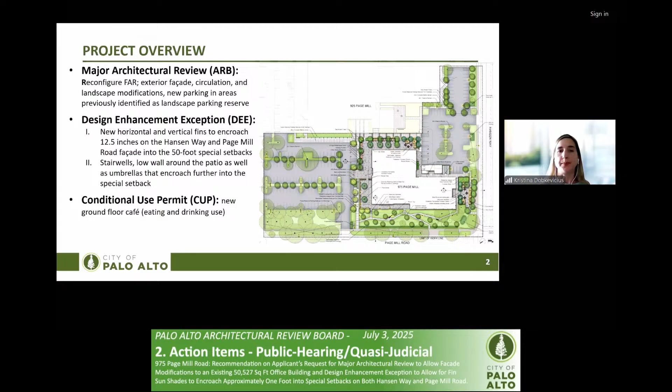A little about the existing structure and proposed exterior changes: the existing structure consists of two-story concrete tilt-up panels with punched window openings and setback green tinted glazing on most of the facades. The primary entry facade facing the Page Mill Road parking lot features a green tinted and white spandrel glass curtain wall system above a ground floor arcade with multiple entry doors. There's also a large paved plaza with small ginkgo trees separating the parking lot from the building entrance.

As part of the architectural configuration, the previously clipped entry corner facing Page Mill Road will be infilled by relocating and realigning the structural bay closest to the 925 Page Mill Road building at the back. The new exterior will be composed primarily of large format white terracotta panels with varying vertical rib projections. Zinc-clad panels will complement these surfaces and be used at secondary entrances and to accent window pairings across the elevation. New walking paths, outdoor seating, and gathering areas are proposed, and the existing entry plaza will be redeveloped to provide ADA accessible parking, delivery access, and staircases.

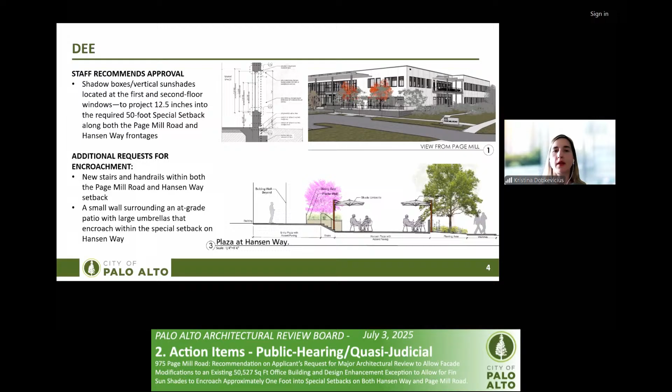The project also includes conversion of 3,769 square feet of existing office space to an eating and drinking use on the ground floor—a cafe use—which the applicant states is intended to serve employees within the building and the broader Stanford Research Park area. The proposed cafe space is permitted through the requested conditional use permit and is consistent with the Research Park land use designation.

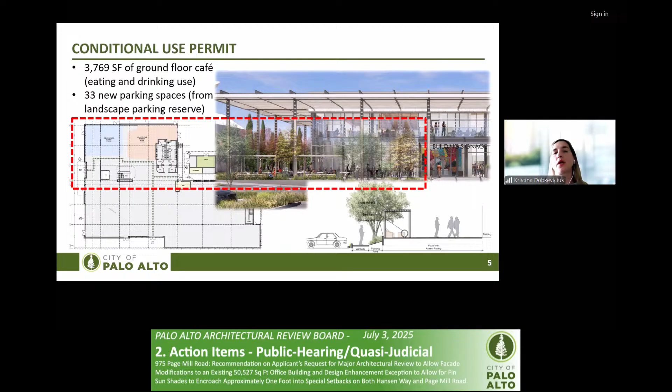A number of existing parking spaces on the project site are currently located within an approved landscape reserve area, originally approved under the 1997 architectural review approval action for the building at 925 Page Mill Road. The project removes 43 substandard compact parking spaces and narrow drive aisles currently located in the landscape reserve, and proposes 33 code-compliant spaces with wider drive aisles on the site.

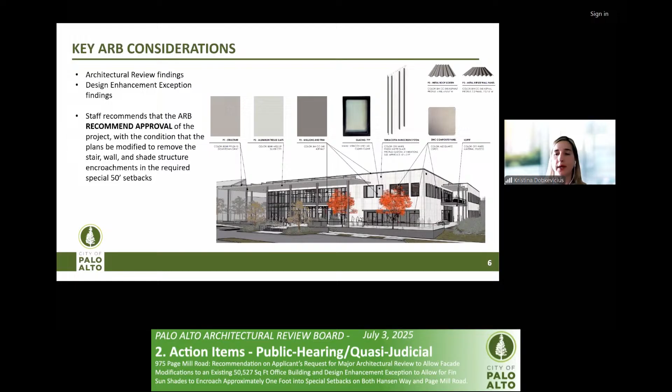Staff finds that the project is mostly in conformance with architectural review, conditional use, and design enhancement exception findings. Staff recommends that the Architectural Review Board recommend approval of the project with the condition that the plans be modified to remove the stair, wall, and shade structure encroachments into the required special setbacks on both Page Mill and Hansen Way. Staff finds the project consistent with relevant plans, policies, and regulations adopted by the city, and recommends the ARB recommend approval with selected modifications to the Director of Planning and Development Services. Thank you.

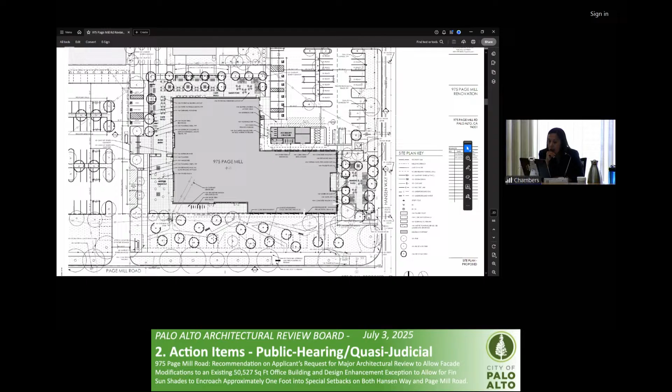Yeah, that's correct. So I don't think that's the ramp. And I guess the bigger picture question is, generally speaking, a building that may be elevated and it's right at the setback line, would they not be allowed to put stairs to go up to the building within the setback?

So those stairs are not required for access or entering or exiting the building. Those are additional stairs. For example, the one along Hansen Way is for the employees of the building to go down and have a break, relax in that area, and come back to the office. So it's more like an amenity space for the staff. It's not an exit point.

And no, the answer is no. We would not allow stairs within a setback unless it was through an exception process, or it was written into the code that you could have stairs encroach. There are code sections in certain zonings that have exceptions specifically for stairs to encroach a certain amount into a setback, but that doesn't apply here.

So typically a building would have their staircase approach within the building envelope or buildable area, should they need one. Are we sure that it's not a required entrance or exit though? It's not, I mean, there's already two exit points there because you already have the sloped walkway at the end of that as well, and there's an existing exit right here that ramps down.

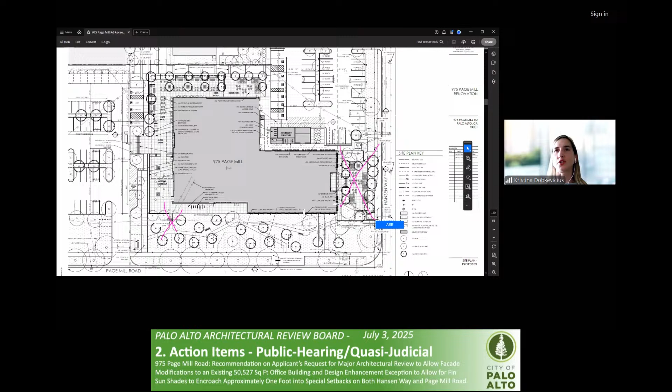It's for the sunshades, for the vertical elements along the facade, for the tiny sunshades. You can see them, correct. So this is what we are recommending to approve, and we are not recommending to approve the patio walls, umbrellas, stairs and steps encroaching into the special setback. We have conditions of approval asking to remove those. Got it, understood. Thank you for the clarification.

To clarify this a bit more, if there were a ramp, would that be different? And also at the same time, could you explain why stairs would be allowed on the Page Mill side with railings? No, it's not. They wouldn't, we are stating that that would require an exception.

To planning staff, it seems an unnecessary exception as there are already code compliant access points, both from Page Mill on the interior and along Hansen Way. And therefore those exceptions don't appear to be necessary, so we are not recommending approval of those.

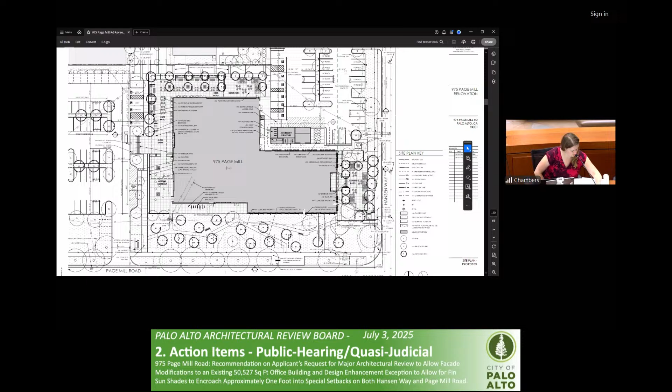And if you wanted to do a ramp, there are ramps. There are grade level walkways that are accessing it, but again, maybe it would be best to hear more from the applicant before we discuss this further. I think we're okay at that point, unless there's any further questions, understanding the clarification of the 50-foot setback. I think we'll move on to the applicant's presentation.

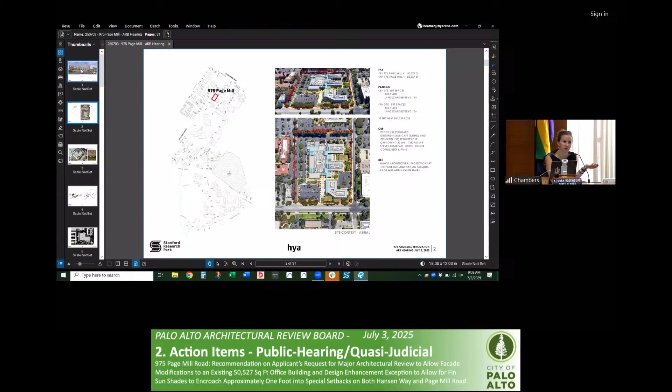Unfortunately, we do not allow that. So you'll give your presentation, we'll have time for questions afterwards. Exactly. And then there will be public comment, and you will also have a time to respond to any public comment that may come up. As long as there is time for questions. We'll have plenty of time. Great, okay.

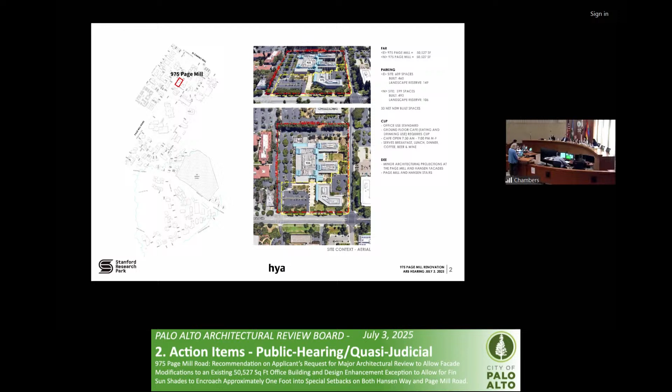Well, thank you very much. Let's get this going forward. Christina did a great job with an overview of the property location. I would like to assure you that this is a small subset of a larger 10-acre site. The yellow area highlighted there is the actual area of work. There are two completely separate structures on the property. The project will remain net neutral as far as FAR in this renovation.

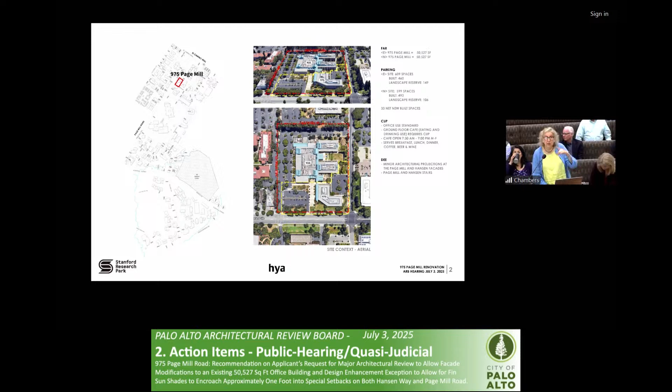As Christina mentioned, there will be 33 new parking spaces developed, and there is a CUP and the DEE, which we've had some conversation about. The existing building is located right at the special setback on Hansen Way and Page Mill, and that corner is very close, only about 6 inches off of the special setback area. The existing building also is built very closely to the adjacent building at 925.

The existing building also is of an exposed concrete tilt-up with that sort of creamy sand color, with red tile accents and the green standing seam metal roof. To our eyes, to our project goals, we wanted to bring this adaptive reuse a clean, fresh, contemporary expression, and the currently dated expression was a primary drive for change and renovation. You'll also notice that the windows are fairly small and mannered. We wanted to enlarge them to bring a great deal of daylight into the building.

A primary goal is to increase the activity at ground plane around the building. The entry plaza separating the building from the parking lot is at parking level grade, which is approximately 3 feet below the ground entry off of the parking lot. As you go around the building towards Page Mill, that corner is 4 feet 9 above the sidewalk on Page Mill. The corner is approximately 3 foot 9 above the Hansen Way Page Mill corner, and 3 feet above the Hansen Way sidewalk at that side entrance. So you can see we have some challenges in site accessibility and just plain old access.

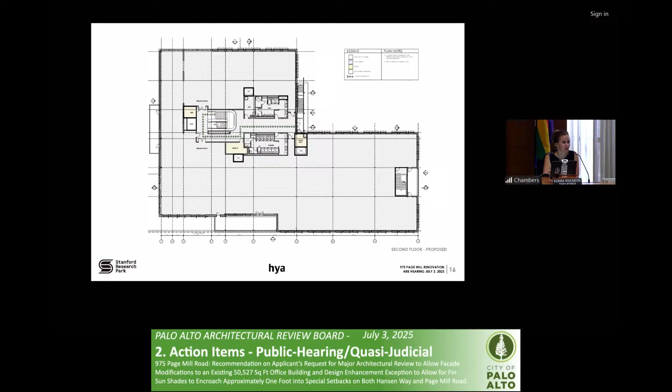Thank you. I'd love to talk a little bit more about the design. The terracotta panels are large, about 2.5 feet wide by 4 feet tall. There are 4 profiles: a flat panel, a single vertical rib, 3 vertical ribs, and 5 vertical ribs.

The material finish board is not the profile we're proposing, but the color and the break of the color on the rib is why that was provided to you. The panels are paired vertically so that when seen across this very large facade, they form a distinct syncopated pattern going across it. The current design is very repetitive, and we were working to find ways to maximize window size, bring life and distinction and modernity to the facade to make it a bit more timeless.

You're also seeing an example of the vertical sun fin, one of the staff-supported design enhancement exceptions. These vertical fins on the Page Mill facade and horizontal on the Hansen facade work with the solar orientation to better shade the windows and walls. The windows are very deep set and naturally shaded, but this additional shading helps reduce solar load and reduce energy costs. The whole building is getting a brand new mechanical, electrical, and plumbing system.

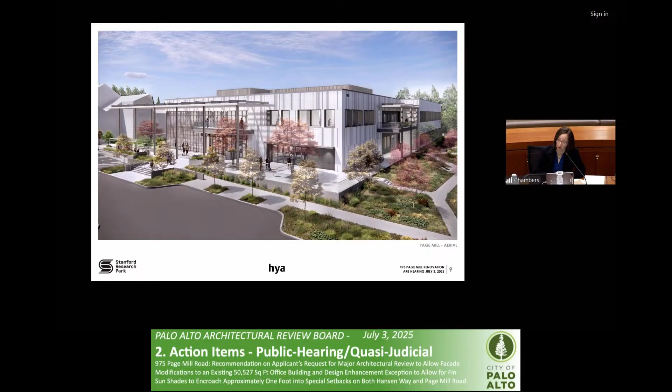Right, so they're painted into a corner here. Right, and significant grading that brings the level of that area up higher would, similar to some of these improvements—actually more so than the proposed improvements—get in the way of other future use of this space, if that really is at least part of the idea with the special setback: that it reserves this space for future planning efforts with the roadway or how the research park is envisioned in the long term.

So staff would have a significant concern with that level of fill as well. Okay, so going back to that, it seems like because you're building retaining walls for the patio, are you building up grade with this definition we just talked about? Only minimally, to facilitate drainage. It's not a primary effort. So is it possible that if we didn't have the concrete walls around the edges, the patio could be a slab with a thickened edge, without the wall? Is that true?

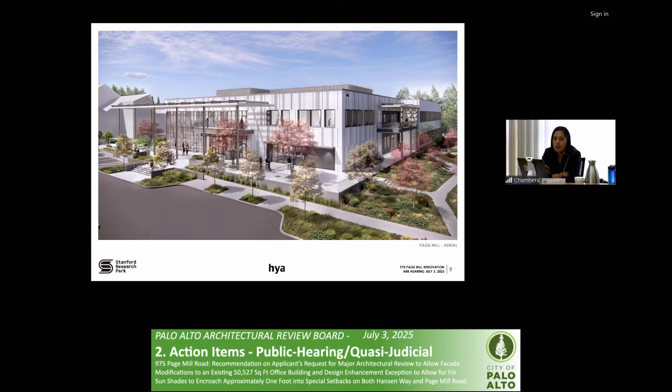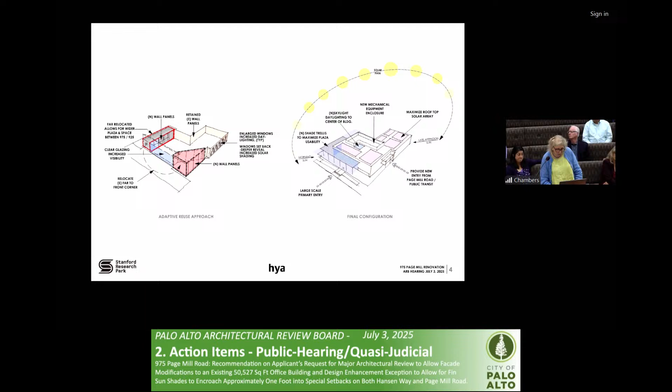No, and maybe I'm misunderstanding. The patio itself is more at the sidewalk level. The area immediately outside—let me see if I can go back to the aerial, or is there a site section? Right here, you can see—actually, you can't see it. There's a sidewalk adjacent to the building right now, and then there's this very sad little triangular piece of concrete, and then you're fenced in. You can't really do anything because of the grade change.

Trying to get that area—I think if you go to your A101 plan, that might be a good place, or this one. Yeah, fine, this is a good one. You can see this, and again, this is a required egress for the second floor. It has to allow connections to the public way, and it does so—this, here, correct. And then we chose to connect it to this new network of sloped walkways and seat benches on the Page Mill frontage with this shortcut here.

Again, the site is dipping down this way, so you've got your highest point of change in this location. The existing trees, shown as single circles versus the shaggy circles which are the new trees—we were trying to protect that group here on this corner, as well as this group, and then turn this from that sad little... I'm sorry, I can't be as derogatory as I should be, but it is a very sad location. We're really just trying to make it an inviting, usable space. It is a very visible corner.

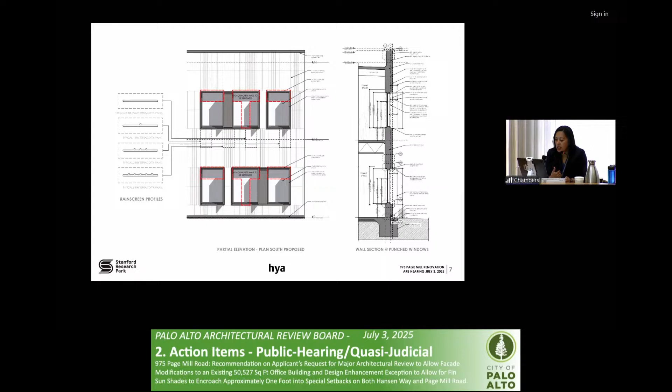I'm going to get it wrong. The ribs on the panel are 1 inch. The fins that project either horizontally or vertically, I believe they're 12.5 inches. One facade is slightly further away from the setback than the other, so one of them, I think, encroaches 12.25 inches and the other's like 11.25 inches.

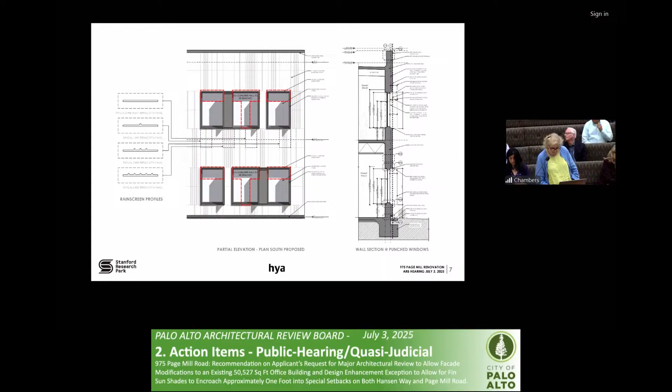This is showing the vertically oriented fins, and you can see them here on Page Mill. When you get to Hansen Way and to the Hansen parking lot, they turn into horizontal fins. On the Page Mill parking lot side, there is no need for them there, so they aren't there.

Oh, I see. So on Hansen's side, it's just a top fin, because the section on page 131, which I think was clipped on the page you had before, shows the vertical fin and it seems to project into a walking surface down at the bottom here. If it's vertical, but I don't know if it's vertical.

Correct, that's correct. So here on Hansen Way, they're horizontal when the sidewalk is adjacent to the building, so they're 10 feet in the air. But on Page Mill, when you have landscape adjacent to the building, they are adjacent to the windows and no one gets close enough for them to be an impediment to access.

So is that providing enough shading for what you're trying to do for 12 inches of projection? We looked at making them longer, and we are working with an energy modeler and sun study evaluation group. We're trying to find the marriage of architectural design and buildability, using some more standard profiles for the aluminum trims at the window, and we believe this is a combination we can achieve.

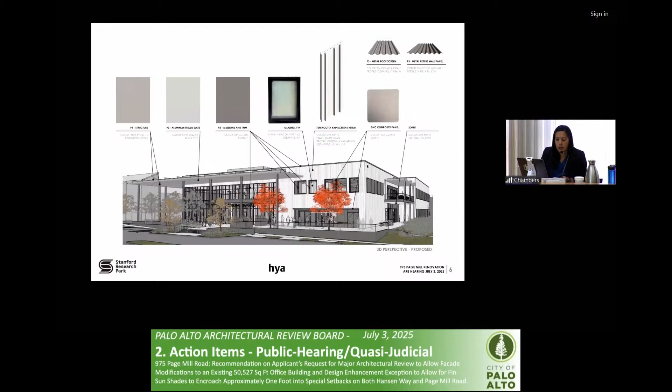Yes, the roof screen is the P3 mullion and trim color, the darker of the three. The roof screen is a corrugated material with 7 3/4 inch center to center vertical ribbing. We're also using a corrugated panel for the exterior accessory structure with bike storage, building storage, and trash recycling, but it's the same color with a different profile and narrower ribbing.

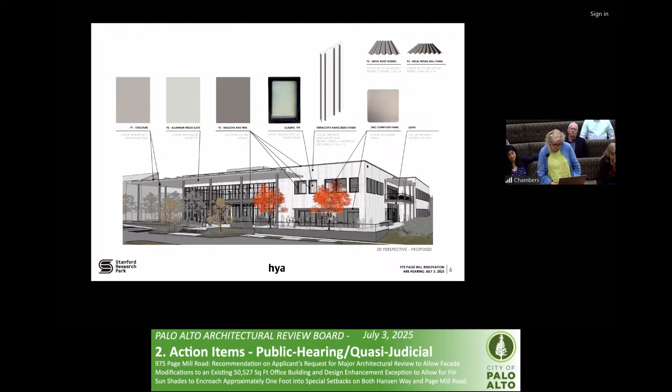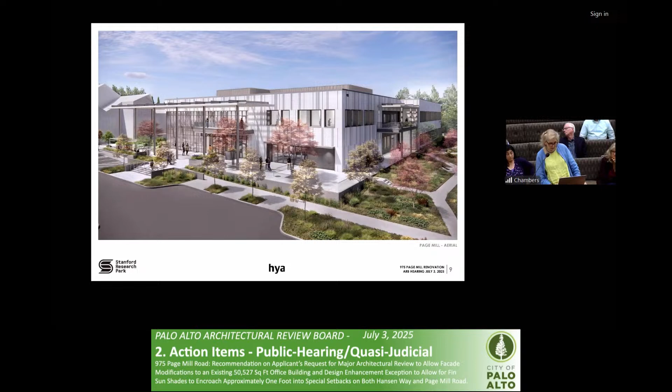They're very differently viewed, and we were actually very particular in locating the mechanical roof screen. You just barely see the top of it here, where our eye level is clearly at about 30 feet. You'd be hard pressed to see it as a pedestrian, and you don't see it even with an elevated visual point of view at Hansen. You do see it a little from the Hansen parking lot, but even there our eye level is about 15 feet in the air. There's the accessory structure over to the left - an existing concrete building we're now cladding with painted aluminum panel and extending.

And the terracotta fins - you said they're an inch, like in this view the shadows make it look like it could be quite thick, but...

I apologize, this is not as strong a representation as this particular image. They're about 1 1/8 inches wide and then 1 inch thick. The edges are softened, both the outer and inner edges. Actually that's one of the things we really loved - how the glaze and light is going to fall across that during the day.

Cloud cover - I'm sorry to gush, we're in love with that white color. It just does magical things when the clouds move and the sun moves.

Thank you. So speaking of those white terracotta tiles, I love them too. I was just trying to imagine this building clad in those tiles, the whole building, especially on the Page Mill side. The building is fairly long, and now that I've seen the sample, it has a little sheen - almost semi-gloss. So I was wondering about even the glare from the outside, since the building is so white and so big, and the sun is shining.

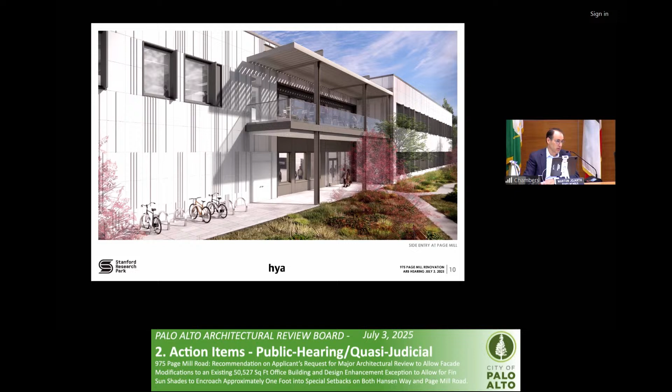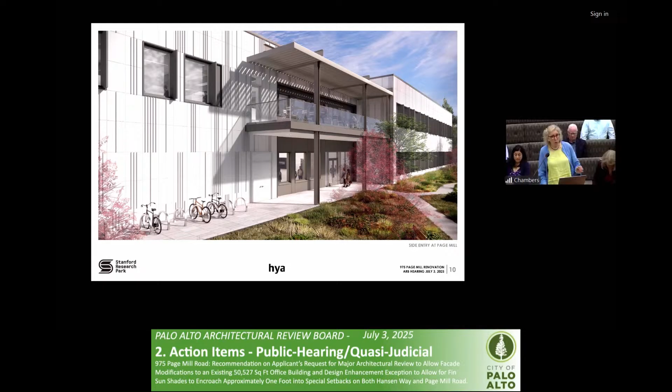The length of the Page Mill facade was something we recognized early on had the potential for repetition and monotony. Let me go to that hard elevation - sorry, it's going to take me just a second, this is going to slow down.

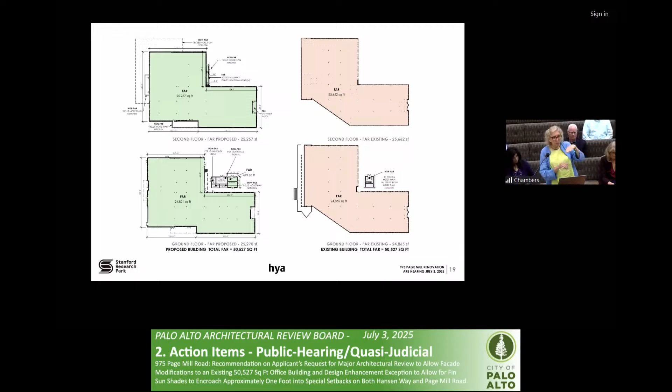Apologies. One of the reasons we stepped back the Page Mill entry was to break the facade. We also wanted to be able to emphasize the Page Mill entry with that balcony and trellis, to bring additional color and variation to the overall facade length.

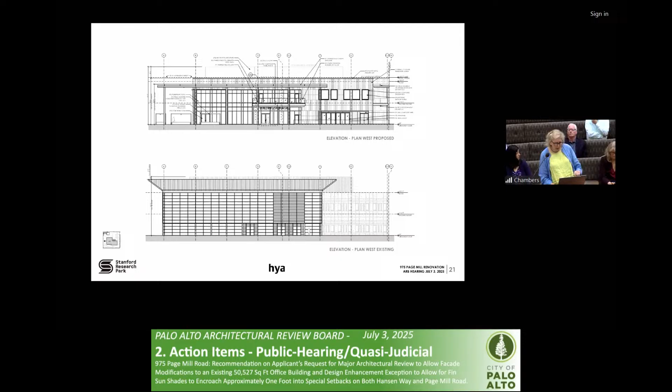This is the facade - I'm sure you noticed the pair window, pair window, pair window pattern, so there's the zigzag of that component. This portion has no windows and a slightly different window pattern above. There's an extensive use of zinc and larger panes of glass at the entry on both the lower and upper floors.

We didn't really think about alternate colors or more than one terracotta color. The finish, I think, is actually more on the matte side than semi-gloss. We've taken it out in the sun, and we have some larger samples on the way, but we've looked at it in different angles, high and low. I haven't been too worried about that glare issue you mentioned. I'd like to think we've been proactive in addressing the length of the facade's design with the approach you see here.

We're really trying to have something clean and simple. I don't think you're mentioning enough the design idea here with these vertical elements that break up the pattern, and break up their own pattern as well. So there's a very casual feeling to the outside of the building.

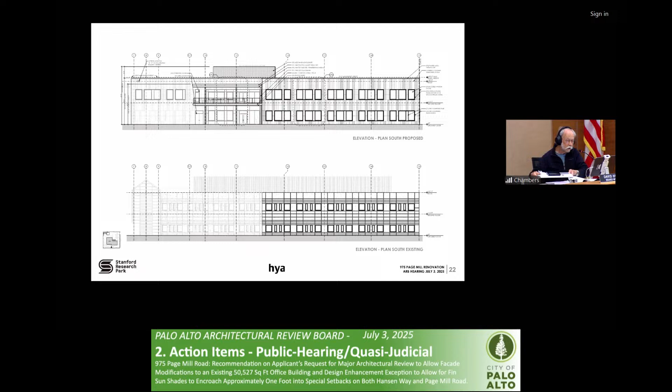I agree with David. I think the shadows and lines will break it up nicely, and also the concept—I love talking about LRVs, I love that paint sort of stuff—but this one, because of the texture and because there's an organic element to it, it's not a sheet of metal. Because it's terracotta, it's got very minor pitting and texturing that will bounce the light around slightly differently. Even looking at it on the board, I'd argue it's closer to almost a very light gray, but it's not—it really is a white, just a muted white.

I feel like I'm supposed to have a question here because we're not supposed to make comments at this time.

Let me ask, do you know the LRV of it? That would be the question to ask. I do not, but I'd be more than happy to have any of you come to our office and see the 50 other whites we explored in honing in on this particular one. It is a tough thing—some go purple, some go green, some go gray. This one has just a hint of warmth to it to knock down some of the bright white.

And these lights, you do have a mix of— Terrible. Yeah, daylight and, well, yeah. But it has been a love of ours.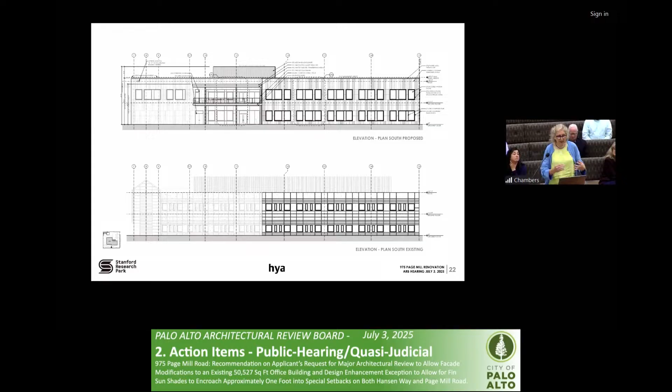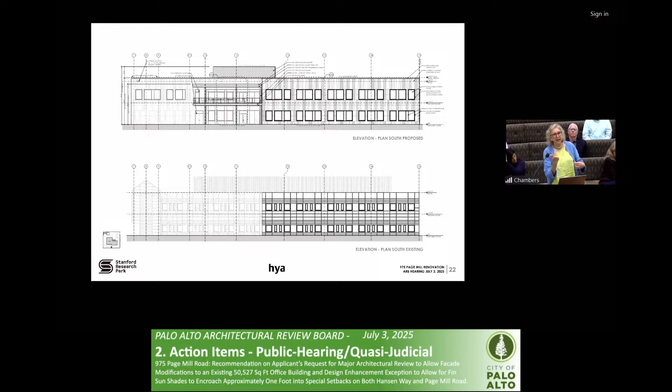I do want to go back to your question about the overall facade. One of the things we talked about early on is that this facade in particular has to read when people are going 45 miles an hour on Page Mill—zip, zip, zip. It has to read when they're at an intersection paused for a moment, and it has to read when they are adjacent to the facade, engaging that landscape area at the front of the building. So as David mentioned, we wanted layers of scale, layers of texture, and bringing in that extra color just felt like going sideways from that path. Thank you.

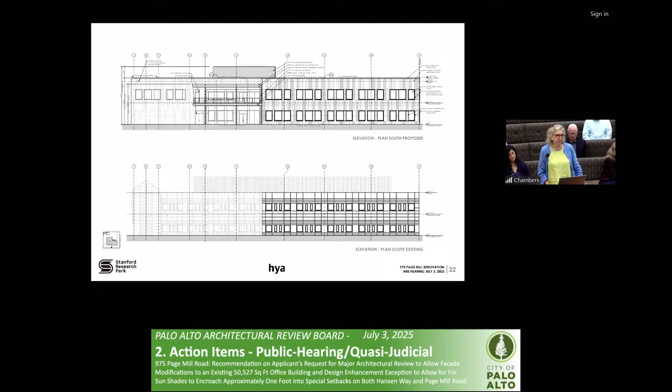I'm going to ask for any final questions from the ARB for the applicant and or staff. Go ahead. Thank you for your presentation. I have a question about the circulation. Can we move on to the site plan? Yes. Sorry, let me see if I can get there faster.

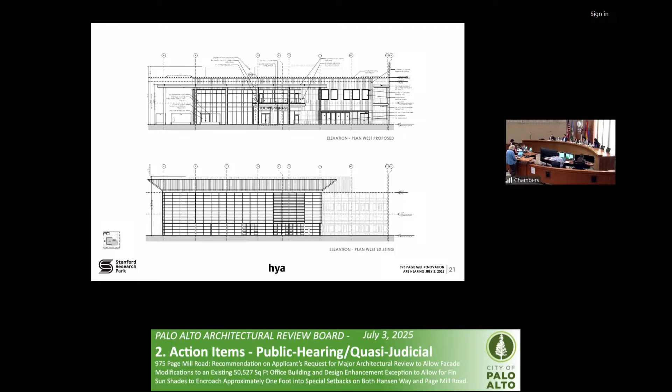While I do appreciate and understand the reason why you want to raise the front patio and have a more inviting entrance plaza to the 975 building, what I noticed is that compared to the existing very wide plaza walkway connecting both 925 and 975, with the proposed parking lot and the raised and relocated stairs, it seems like 925 is kind of disconnected as originally proposed.

So it goes from a 20-foot-wide plaza walkway down to, I don't know how wide the ramp is, but it's narrow. Also, when people want to access 925, they have to go up and down through the ramps. So I want to know the reason why you want to relocate the exterior stairs, and what the impact is for the existing pedestrian traffic pattern. Thank you.

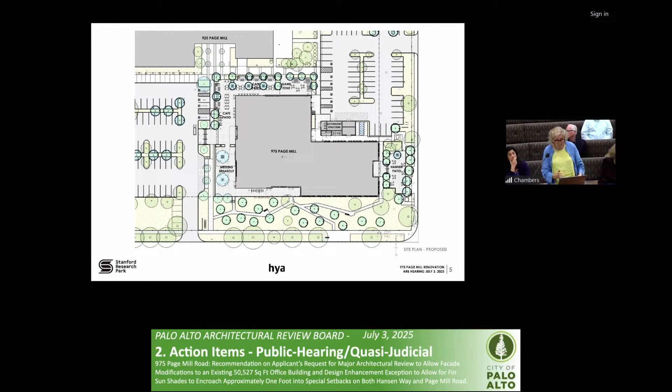I don't believe our project detracts from the entrance that you feel here when you're in the parking lot going towards that building. I think the two of them sit together as two separate buildings on the same site that respect each other, but don't necessarily have to mimic or copy each other.

The 925 structure has what we affectionately call beaks, the little projecting roof components, and that was a big theme going around for the whole campus. It always felt like it wanted to be a trellis, an architectural embrace of the area outside of it, but it never quite got there. So we feel our wraparound trellis is what that building wanted to be, to embrace the landscape and to reach out.

It's a 10-acre parcel.

Thank you. My question is more like, what's existing here, the red line shows the existing plaza walkway, so now we just shrink down to that narrow. Does it impact the traffic pattern?

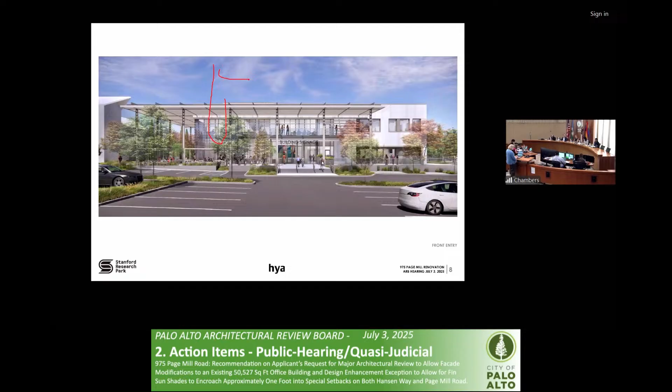Great question. So all of this area is open. There are no interior walls until you get to the wall behind the servery. So this is representing a pedestrian interior circulation path to the seating, the outdoor area. You could just use this path if you were in the building and wanting to go to the patio. It's not necessarily that you are part of the cafe dining or the back of house or the servery zone.

I see. And one minor question: I see the main entrance door is offset from the center line of the exterior stairs. Is that on purpose?

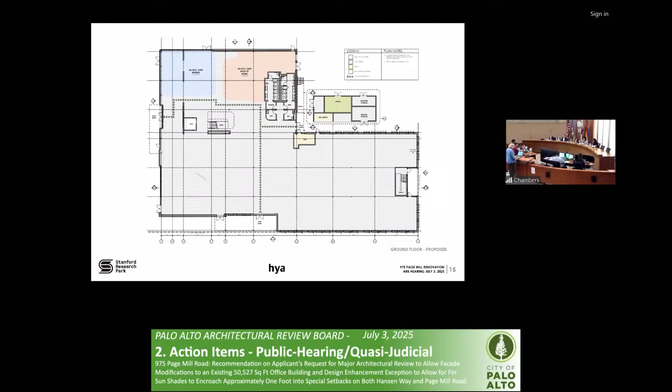Well, part of our adaptive reuse is to retain the existing structure as much as possible. The second floor has a 24-foot column spacing, while the ground floor has a 12-foot column spacing. So this is one of the quirks of an adaptive reuse project.

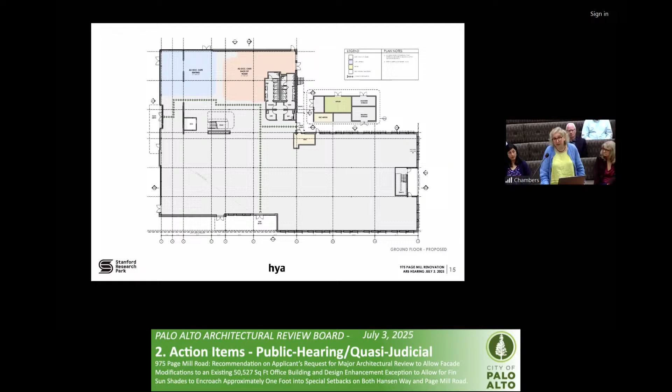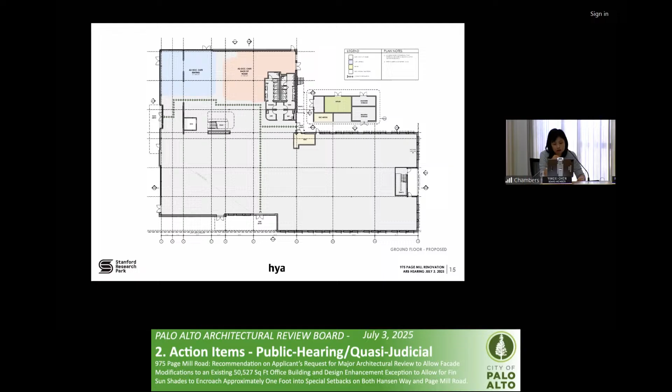We hope that the way we've incorporated it adds some interest and variety to the building, and still is a solid design. One last question for the materials: for the exterior stairs accessing the second floor, what's the railing material? This is glass at the rear parking lot. It's a perforated metal panel from Bok Modern, and we're working with them to customize the pattern so it has proportions as close as possible to the ribbing and shadows happening on the wall.

Okay, and how about the low concrete wall? What's the finish of it? Is it smooth finish or like the back patio we talked about? I believe the finish of the low concrete retaining walls, Marco, is just smooth concrete. Okay, thank you, that's all my questions.

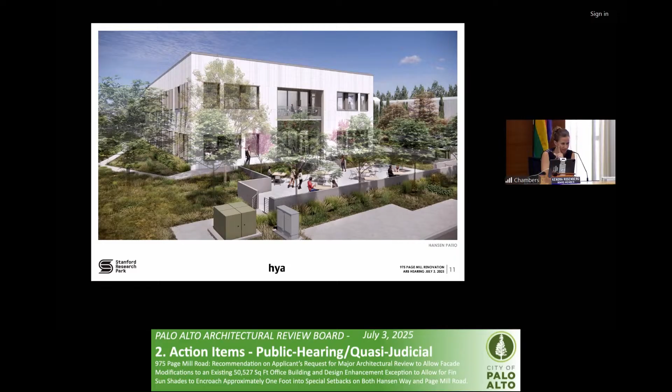I'm going to keep my questions pretty short. No, if you'll just humor me for two more minutes. Can we go back to the site plan really quickly? Yes.

So just to clarify, we've got easy access here, here, and here, and then people can obviously go down this ramp, which goes down and then back up, if I'm understanding correctly, because this is a higher side and this is a lower side. Is that accurate? Correct.

And then for this staircase here, sorry, I'm going to delete my own stuff. On this corner, is there any reason—I understand you've got a door system here so you'd want immediate emergency access out instead of having them go that way, that makes sense to me. The question would be, why couldn't that staircase be incorporated in the corner over there? Why would it have to be outside in that special setback? That is an excellent question.

We were trying, as you can see, to extend the edge of the building here. We did a number of studies where we looked at some switchbacks, and it just felt disruptive to anybody taking their bike back to this area, or who had come up from here with their bike after getting off the bus and dropped it off there. It felt like a missing tooth when you nibbled it out of the corner of the patio.

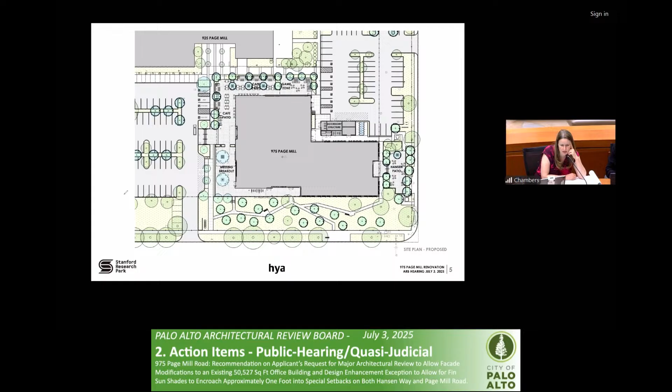Just wanted to note that if the board wanted to consider that, we would need direction to update the findings prior to the director making a decision, and there would be some condition of approval added to reflect that. Yes, it wouldn't be like an encroachment permit or anything. Okay, sounds good.

All right, I'm going to kick us off with final comments, final thoughts. First of all, I would commend you on the design of the building itself. I think the fact that we did not speak to the building very much indicates, as we know in our community, that it usually means it's great.

We only talk about the things that annoy us or have questions on. So the fact that your building was largely approved, in my mind, I think we all sort of didn't have very many complaints would be the way I'd phrase that.

I'm very fond of the striations in the terracotta tiling. I think it's a unique and interesting material. I think the adaptive reuse you guys are trying to accomplish here is going to be a huge improvement from what's there. I think everyone can agree with that.

We talk a lot in Palo Alto about having indoor-outdoor space. We live in a community blessed with exceptional weather, and we really value our indoor-outdoor time, our connection to nature, and our love of trees. So I think this site is taking a building that's woefully dated and giving it the new vibrance it really needs. On a personal note, I think the concept of what's going on inside the building is also quite interesting and intriguing.

Living in this area, we all know somebody who's been in an incubator at some point trying to get their startup off the ground. I think having a space like this will be hugely beneficial to the tech community we live in and to the potential future businesses that will arise out of this area. So hats off for that as well.

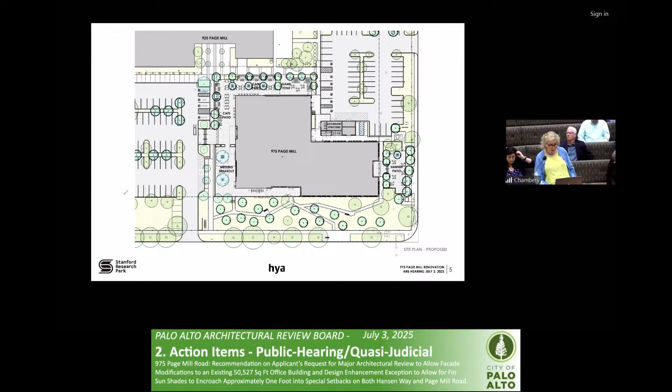You bring up an excellent question. Actually, Jamie Jarvis did a presentation to the Palo Alto Art Commission a week and a half ago, and the image you were seeing of the art at the rear wall of the main entry is in fact part of our public art contribution. They agreed that lobby location, that wall, was highly visible, front and center. The building is open 50 hours a week to the public, so it met the criteria for that. We will be reviewing the proposals for that with the Art Commission as the project moves forward.

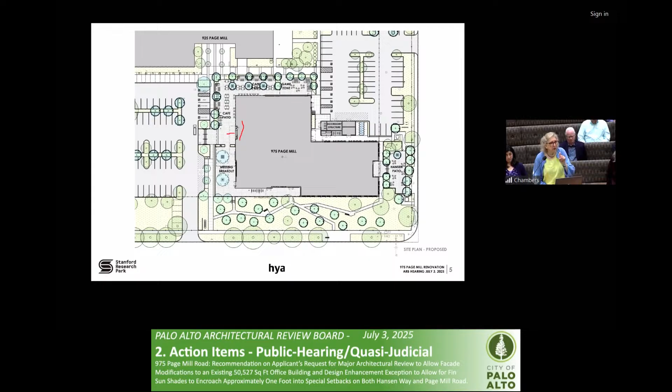Appreciate that you'll consider how you light that since it is an interior feature. The front of the building now faces the parking lot, and it's a terrific scale. It's important to have it that high because it's competing with that element on the adjacent building. It creates a different character, which I think is terrific, and maybe someday they'll actually imitate your design versus the other way around.

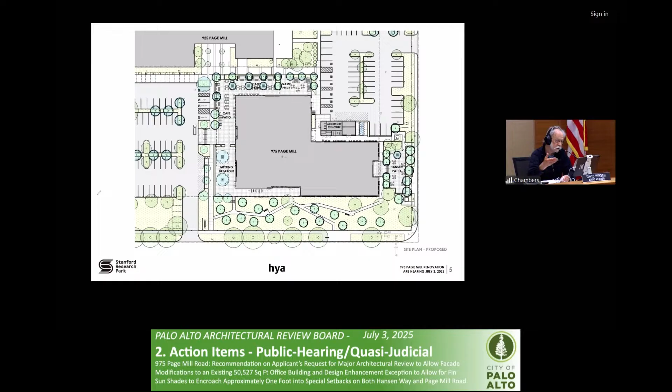I have only one other comment to make, and that is, will there be, from the window that faces the parking lot on the west side, the Page Mill side, as it faces that large open corner windows, series of windows, will they have extending canopies as well above the windows? Or is it a flat surface? It seems to me the character ought to represent what's going on inside, because the extensions not only are for lighting and sunshades, but they're of the character of the building. So without saying do it, I'd love you to just explore it as a possibility. I think if you look at it closely, you may decide it ought to be an inclusion on that side, giving a little more depth to the face that is out.

Consider that. But other than that, it's a very, very nice building and does improve, I think, the character of the whole of the research park. Thank you very much for that.

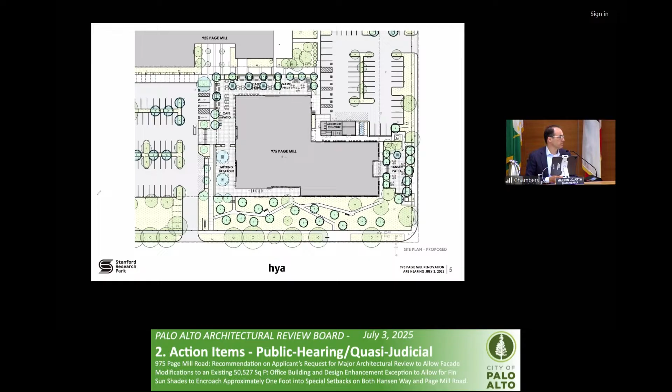Great. Okay, thank you very much. David, did you have something?

Well, I just wonder if we want to put this into some wording that would say how we feel about this, and vote on it. I'm happy to draft a motion and see if people agree or have any friendly amendments. Everyone okay with that? All right.

Additionally, I would say the Hansen patio be approved as designed with the exception of the front retaining wall along Hansen Way. I do think the rear ones should also be noted - they should be as minimal as possible, to retain the tree and allow for its appropriate survival, but maintained as minimal as possible. And specifically that the staircase between the patio and the building be approved as an exception.

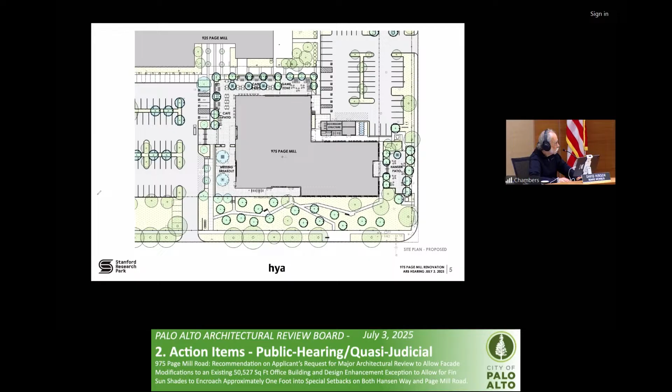I would start with your third part, since that's the most important thing we have to say to planning and the city - so I would reverse the order, but sure. Could you explain more what needs to be done on the wall adjacent to the street side? Because some kind of retaining wall has to be used there. My thinking is that the one along this facade along Hansen Way does not need to be there.

I'm not finding an excuse that it couldn't be done with landscape or shrubbery instead. So in my mind, they can do whatever they want with landscape, but I'm having a hard time concluding that it's a requirement. Martin made a compelling argument that the security of startups might be at play here, but if that's the case, then they just might not be working outside.

Or they'd be tucked into this back corner where they've got a retaining wall and a tree behind them. So the concept that they'd need this particular retaining wall for the security of whatever they're working on was close, but not quite enough to push me over the edge. I think landscaping should be enough, a major amount of landscaping perhaps.

Is it possible that it could continue, but the concrete element should be minimized? Well, I had thought about the concept of a seat wall or something like that, but again that's not providing security. It's really providing a physical barrier between the sidewalk and this patio. And while I understand the need for separation of space, I think that can be achieved with landscaping.

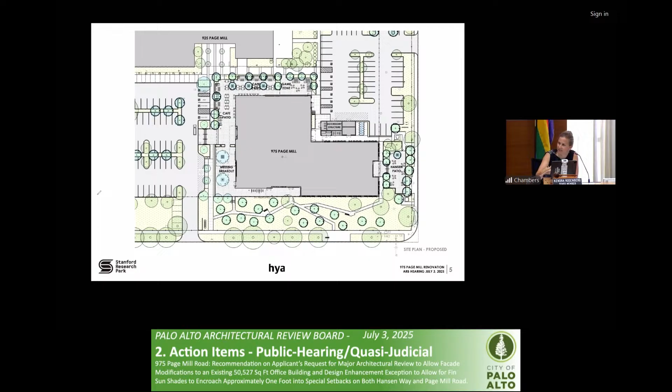So I can't find a reason, unless you guys can convince me otherwise, that there needs to be a physical fence. I think the concrete wall is too much, but if it's a physical barrier, like a low guardrail-type box finish hedge, that would be fine. So you're okay with a planter box? Yeah, a planter box works.

That's landscaping, landscaping that's movable. The wall itself is visually more of a barrier, and I'm not convinced that you need to sit at that edge working on confidential material when you have this ginormous building and patio wraparound in a more secure area, right? So that Hansen patio does not have to be the one place where you go look at sensitive material.

But it is, to the findings, a building enhancement that cannot otherwise be achieved. Agreed. Have that patio, and I think that's what we're supporting.

So point number three, Claire, would be that the staircase between the patio and the building be allowed, because we do feel that's a site feature that, because of the grade, is somewhat the only possible method to get from patio to building. I think it's a safety feature that people could run out of the building a little bit faster, and it will definitely enhance the neighborhood.

Okay, so those are the additional elements in terms of the findings that you believe justify that exception. Do we need to add some language to direct staff to update the findings to reflect that? Probably. We'd invite you to include that as a note, maybe with these items, that the ARB would recommend additional conditions be added to allow for future removal if requested by the city.

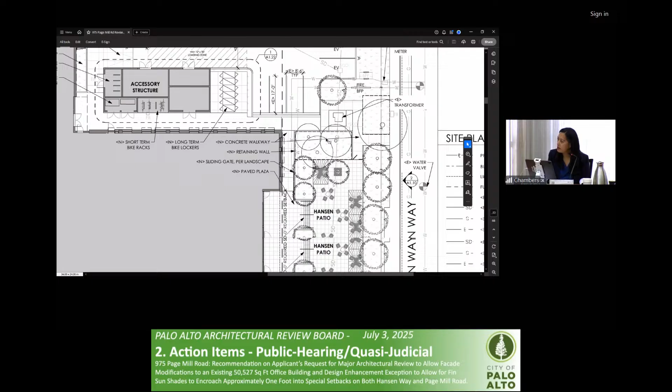Essentially, if there's a hedge planted, you need at least 2 feet of dirt to plant hedges widthwise. And so if we stay right here, here's a tree they're trying to save. Sorry, let me find my pen. Here's a tree and here's a collection of trees they're trying to save.

Correct, so along this edge and this one, if they take up another 18 inches to 2 feet to plant, they're digging into the soil around the trees, and I think that's what they're trying to save. Oh no, I think you misunderstand. You mean this side, right? Exactly, that's the only wall we're talking about removing.

The other ones are allowed to stay as retaining walls, only up to the retaining height though. Correct. In section, here's the dirt with the tree, which is higher, here's the patio, so I'm sitting over here on the patio. This is going to need some amount of adjustment if we wanted to give them the 3 feet of height.

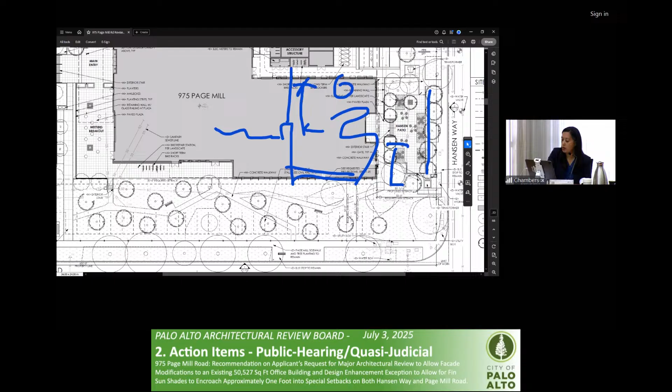Or are you saying this side - this is the section I'm drawing - is only the little curb and nothing else, right? And because they don't have space here to plant a bush to get privacy. I don't think so, the bushes we're talking about are really only along this side here. The thing being asked is that this retaining wall along this zigzag edge just be reduced to follow grade.

So that it's not 3 feet tall the whole way, so it's just a little bit more subtle and minimal. Same thing on this side, that retaining wall should follow grade a bit more. And this one along Hansen is just removed entirely, so there's no need for planting along this.

But there is, because that elevation difference from where the tree is and the patio is, if I understand correctly, it's about a foot to 18 inches. This is where the tree is, right? Yes, and I believe you said 24 to 30 inches actually, which is fine.

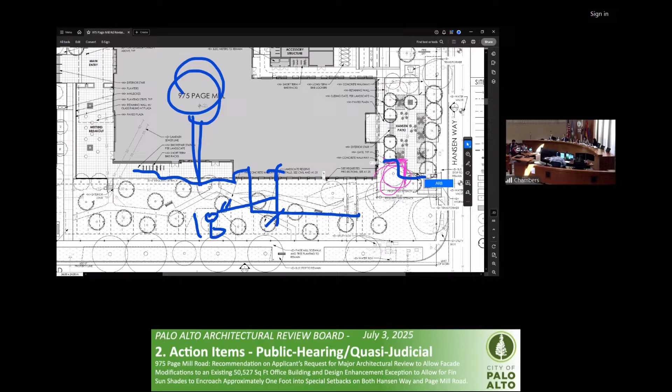So if that needs to be 24 inches tall to retain that tree properly, then that's 24 inches tall. So why do we need a setback for planting? So on these edges, the height of retaining is say 2 feet, and the little gate here goes away, right? Correct. So this retaining wall on the high side may be 3, might even need to be 3.5 feet to retain that soil.

It's not that much, but it's to retain the soil. And so then coming down here, they might still need a foot at this portion, but I don't think it should be 3 feet tall this whole way just because it's 3 feet tall up at the top there.

So it's only a foot, and therefore that patio is open and adjacent, correct. And so I suppose they have a tiny bit of space where instead of a tree, they could plant a hedge there. Instead of these trees, they could plant a hedge here.

I want to give them the option to plant those trees too, which I think will be needed for shading required on the south side. So hedge plus tree, they don't have the width to do that.

Correct, but it's their design choice how they choose to landscape this wall, right? So if they want to go with trees and not have low hedges, that's their decision to make. It's not our responsibility to make sure we have enough space for everything, because then we'd be reducing their patio width, right?

Right. Whereas if we give them the space to do railing, they can get a railing that only needs an 8-inch curb at most, or it could even be side mounted. That gives them the space to get their 3-foot little privacy enclosure, without feeling like if they only do the trees, they're pretty much sitting on the sidewalk of Hansen Way, without any kind of enclosure.

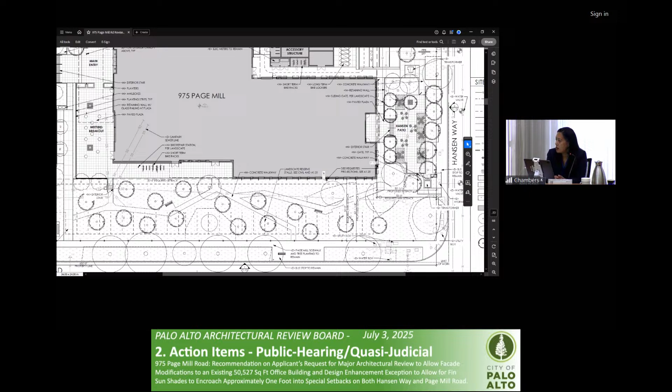Agreed. And we are allowing them to have a patio, but I don't want it to become like a little private extension to a private property versus a patio that's right off of the sidewalk. It is not a restaurant outdoor seating patio, it is a private patio.

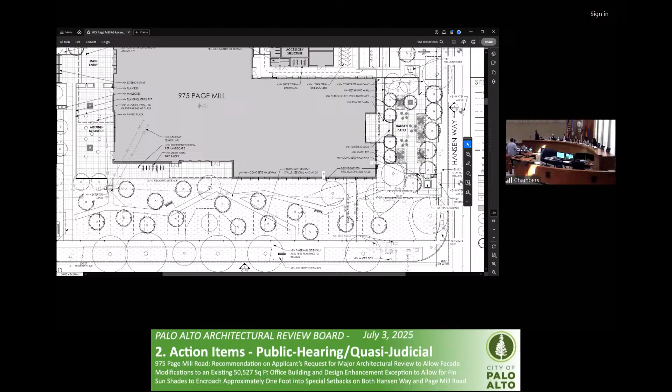Okay, so what if we say to minimize the amount of concrete? Microphone? Sorry, what? Microphone's weird. It looks like it's on but this part's not on, so it's disconnected somehow. The red light on your microphone is not on, so we can't actually hear you. Try pushing your button again. No, push again. Somebody's got to turn yours off. I'm gonna turn you off. Try again, go ahead now. Microphone's not working. We got 3 now. Okay, now I've got everybody, good.

Well, I mean, just to say to minimize the amount of concrete is really what we're asking for. There's significant design yet to be done on this piece, so if we just say to minimize the amount of concrete retaining wall and let them decide what to do from this point on to make this work.

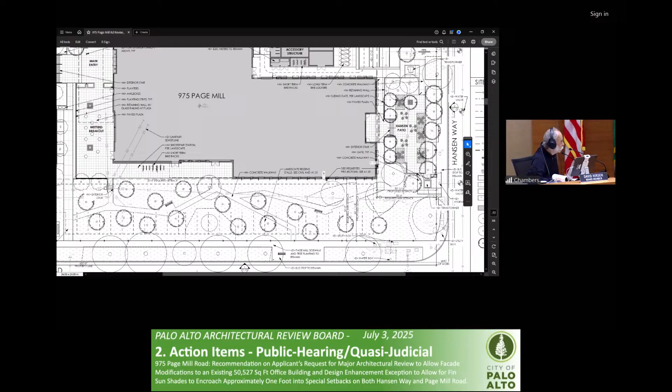And then come back to us in a meeting. Yeah, I'm thinking at this point maybe we do an ad hoc. But the hard part is it's sort of an either or, so we've got to have a valid reason for the design exception. Maybe we say they're allowed to come back with a potential revision to that Hansen Way fencing, as long as it goes through an ad hoc and the ARB is comfortable with it.

But I would also argue that would have to be a 3-foot maximum height of some type of fencing, and that it'd be less intrusive, but maybe they would need to provide renderings or something like that to validate the need for this front fencing. I would be open to that. So if they can come back and convince us that this front fencing is needed for some type of security, that landscape would preclude the possibility of having something more closely related to the sidewalk, then we'd be open to reviewing that in an ad hoc.

Would you be all right with that? Can we ask the applicant if that's something they want to do, or if you just want to nix the wall now and move forward? What's the thumbs up for? Yes, to the ad hoc? We would welcome the opportunity to review that with you.

Okay, friendly amendment by Board Member Adcock for a potential revision of the Hansen Way fencing with 3 foot maximum height to be reviewed by an ad hoc committee.

Date uncertain. Well, we don't have to do date uncertain, we don't really use that so much. I think we can approve this project now with the ad hoc.

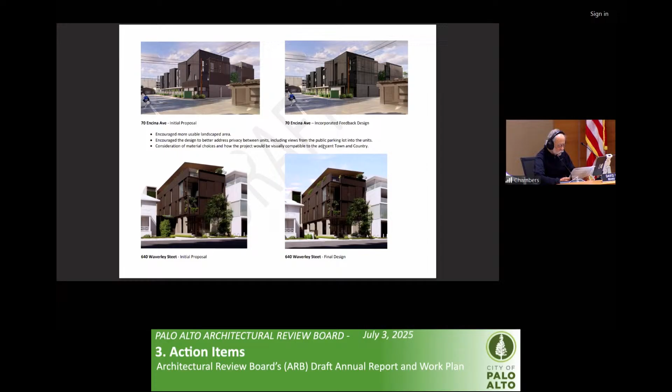Maybe, but when we get down to the elevations on the next page, when you turn the page, that's pretty notable. It's just hard to see in the renderings. You're sort of like, spot the difference, there's some bushes.

Yeah, but on this one, on the Waverley one, it just seems that if we put in anything and we didn't put in the front of it, the side view isn't going to be all that significant to show.

Is that why we had these going two lines? I'd say the same thing. I think, going back to Encina, yes, the front is more impactful, the difference is greater and it is the front. So that we could strike, but for 640 Waverley, the side had impact, but it is a side that is not so exciting, whereas the front, to the architects, I think they did a really nice job.

We didn't have a whole lot of comments, some minor modifications. So, bless you.

Do we show it as this is the project versus showing a difference? So is it just next to the elevation comparison, there's just an image of the final one? Yeah, one image without showing the difference.

That's a nice way to go about that, to show basically the two elevations side by side, and if we could even put the third on the same line or the following line, just have the final design shown. Because you're right that the previous and final are not so dramatically different, but it is an impact that ARB has had on this project specifically. But that might be a nice way to go about that.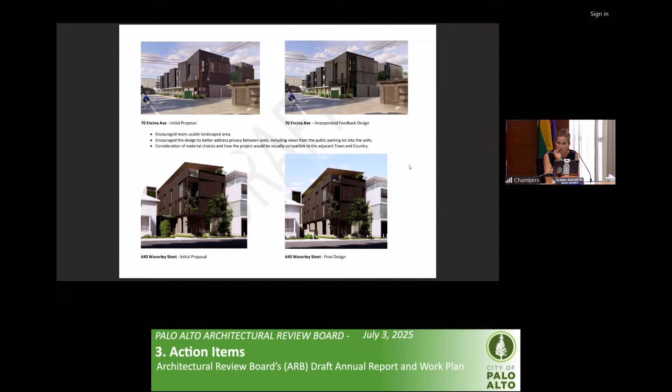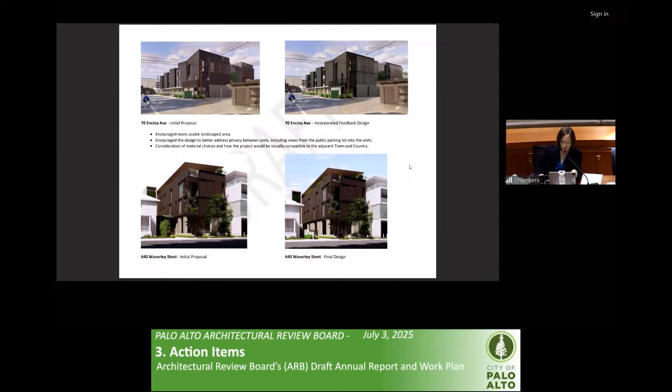So just to confirm, what we're hearing is to remove the two initial proposal images. Sam, if you could go to the next page. Yeah, keep both of those. So we'd remove the initial proposal for 640 Waverley, or sorry, let me start with 70 Encina.

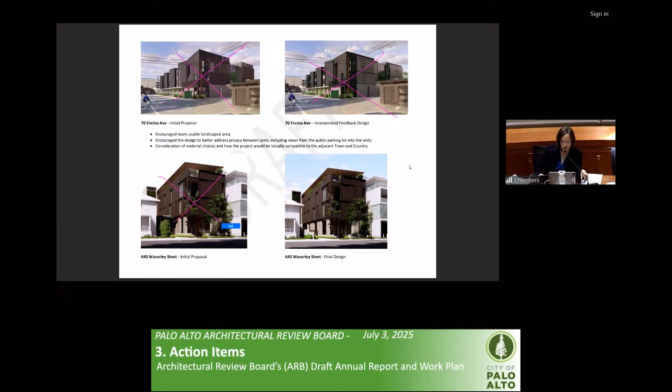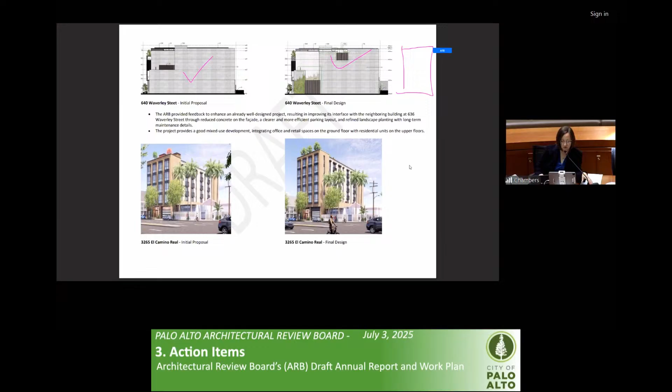Remove both of those, and remove the first one of the Waverley Street project. On the next page, you would retain the final design and the initial proposal. Keep both of those and add a third, side by side, with the final design image there. Okay, like a three-image thing.

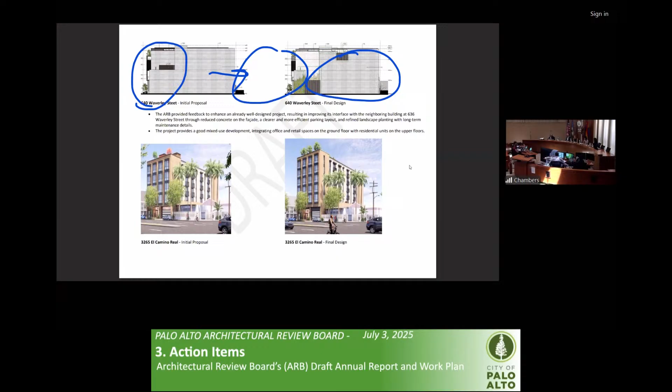Yeah, maybe they get a little bit smaller, but okay, thank you.

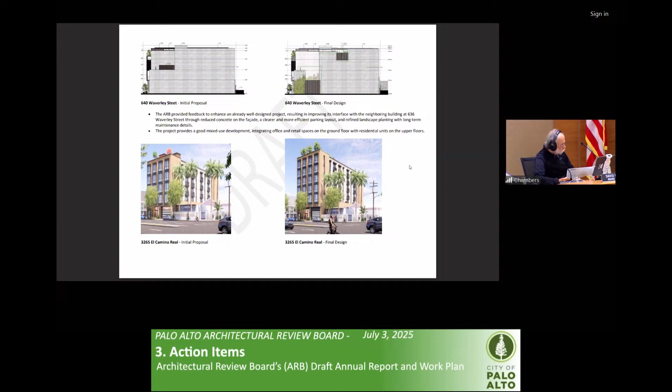On El Camino, it's kind of a similar issue here, but the rear elevation, I don't know. I think maybe it's the side elevation that showed the front staircase and the change in materials that was the important one. Are you talking about the 3265 El Camino? I think the front renderings show, yeah, 3265 El Camino.

It's just funny because they had to zoom out in the renderings, so they don't look quite as dramatically different as they would if they were at the same zoom, if that makes sense. It's tricking the eye a little that the one on the right is much taller.

We could reduce the size of the left image so that the palm trees are similar in size, or something.

I think the back could go away. Well, I would disagree. I think that's very clearly showing there's a huge height difference, and we emphasize the back a little bit differently. I would argue respectfully that the back images are helping to clarify the renderings.

I wish they were on the same page, but that's a formatting thing. We don't have it here, but what happened is the other staircase, which you can see in the background, we did change the material similarly to this stair in the back. So those two kind of relate to each other, but we don't have that drawing here.

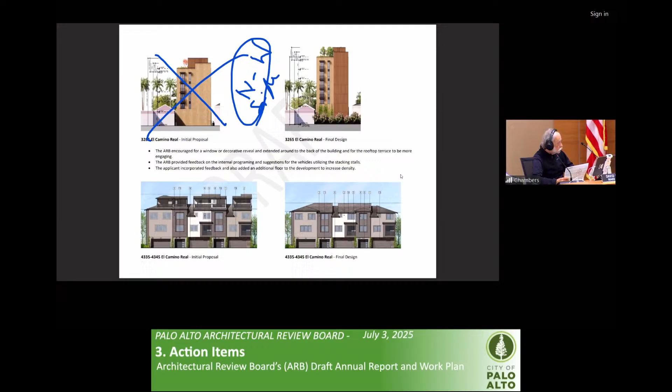The northwest side is what we're looking to add here. Add one other one in, and show the relationship of the two staircases as a significant change.

If I can be a little nitpicky, I also have a formatting item. I hate that the project jumps a page. So if we can do a page break at the start of each project and maybe even have a title. So right here it says 45, that should go there, except that's actually not where that is.

Deleting, come on, delete. So this is the start of the new project. There should be some sort of header here, then showing the images, then the text. But the concept that half of this project is on one page and half on another page, I know it's a small formatting thing, but it's complicated to follow. Is this information for this or for that? So I think it would be helpful to clarify that with a page break between projects.

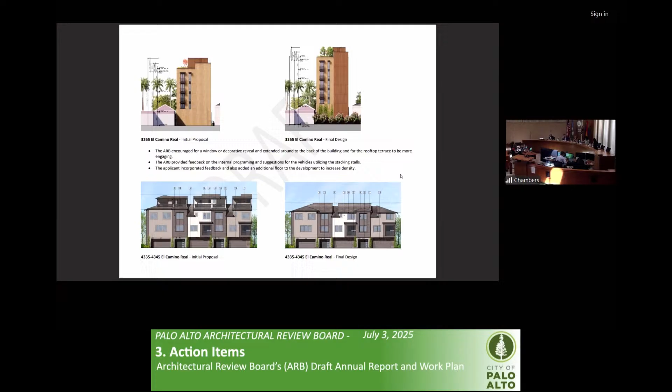And on that same token, the ARB awards starts on a new page because it kind of flows with the example images, so that would be good. Yeah, we can take that direction. Thank you.

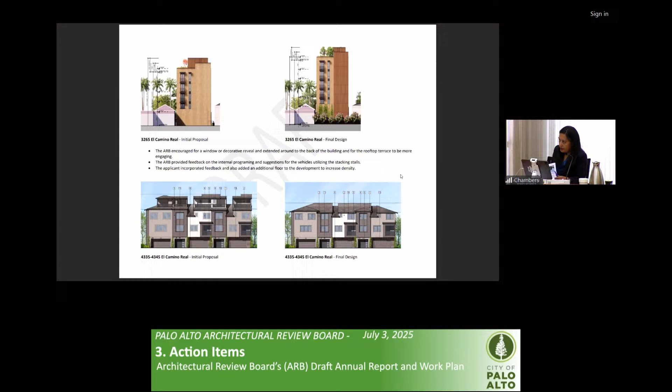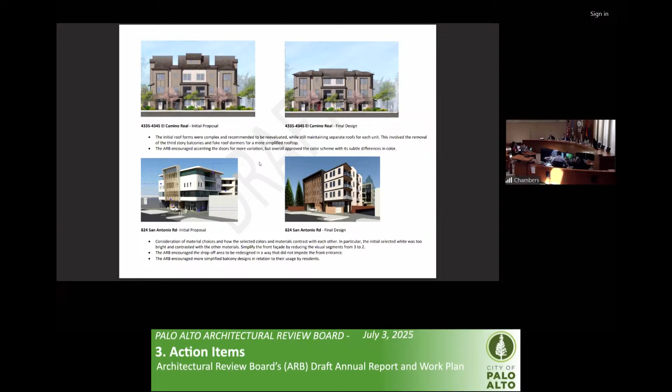Otherwise, the next page, I think they all work well. The next pages, including the Fabian Way, and just a page break there for the ARB awards, right at that point.

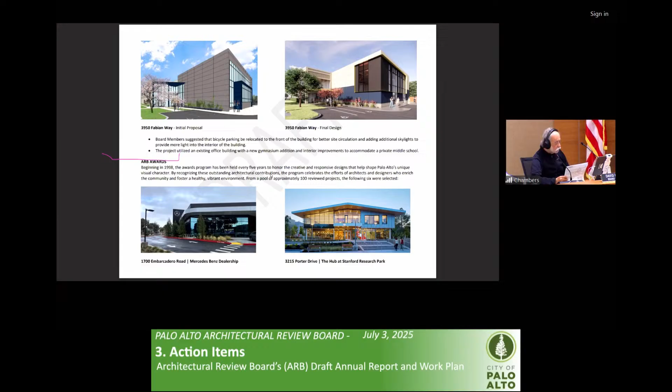I think the award - they're all such pretty, good looking buildings. Otherwise, it's good.

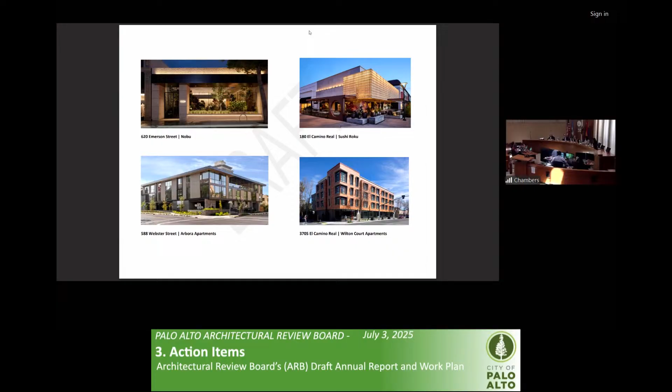I think I hear a motion coming from the end. Motion to approve with the minor edits we just discussed. I'll second that. Can we get a vote, please? Yes, Board Member Hirsch, yes. Board Member Jojarth, yes. Board Member Adcock, yes. Vice Chair Chen, yes. Chair Rosenberg, yes. Motion carries 5-0.

All right, we're going to move on to agenda item number 4 that is not noted as number 4 in the packet, but was updated online: approval of the minutes of the Draft Architectural Review Board meeting minutes for May 1st, 2025. Do we have any comments, adjustments, edits from the board?

I have just a minor one, but it was in a meeting where I wasn't here, so I could be wrong. I'm on page 53, packet page 53, third paragraph from the bottom. The sentence that reads, Georgia Leung, landscape architect, added the bike parking fencing was intended to be a chain link and the back - I think 'one would connect,' not 'back,' or 'would connect' is what was intended.

Sorry, where on page 53 is this? Third paragraph, third from the bottom. Right in the middle of the paragraph, there's a sentence that starts 'Georgia Leung, landscape architect, added the bike parking fence was intended to be chain link and the back one' - I think not 'back or'. Nice catch, I read right past that one.